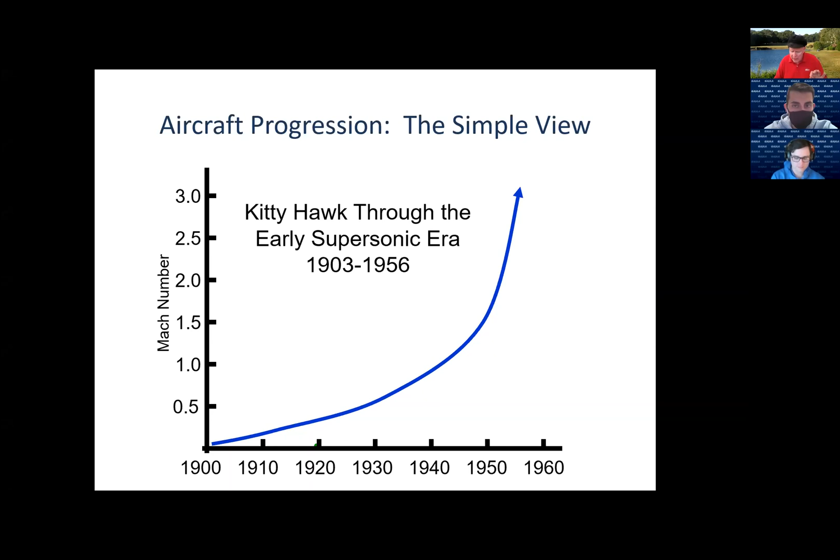And you know, it's your typical biological growth curve type curve and whatnot. And what it really covers, though, what it masks is a lot of things that took place beneath the surface.

So, for example, if we put this in terms of aircraft technology in this time period, you're going basically from the very earliest monoplanes in the pre-World War I era through the first practical propeller-driven transports of the early 1930s, through the first practical turbojet transports of the 1950s, and on up to vehicles that are getting fairly exotic, sustained Mach 3 cruise with the Lockheed Blackbird, things like that.

Now, if you break down that curve and take a look at it in a more detailed fashion according to aircraft type, you see you're dealing with a bunch of curves. You have piston aircraft typified by high-speed fighter airplanes, and that curve breaks off at about Mach 0.65 to 0.7 in the mid-1940s. Piston airliners continue on into the early 1950s, basically at about Mach 0.45 to 0.5.

Then you see the tremendous advances with turbojet propulsion, and then the rocket research airplanes. And once again, this is only going through that Mach 3 regime when you're taking a look from the middle 1950s perspective.

And you see a funny thing take place, and that is in the middle 1950s, you start to see what really is a plateau. Jet fighters peak out at about Mach 2, and they're still really in that region today. Turbojet airliners are in the 0.82, 0.84, 0.85 region, things like that. So there's this plateau, but is there really a plateau here?

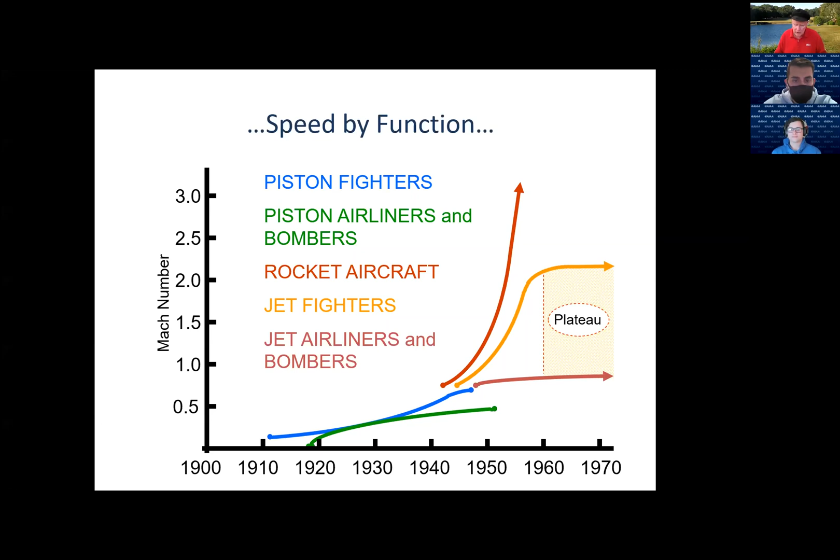Well, actually, if you take a look at it, there's many, many different things taking place in that plateau if we run this out to the present day: composite structures, more efficient propulsion systems, the advent of the turbofan, thrust-to-weight ratios going beyond 1 because of engine technology, digital fly-by-wire, low observables for military airplanes, the so-called stealth revolution, refined transonic aerodynamics with Dick Whitcomb and the supercritical wing, satellite-based navigation, unmanned aerial vehicles, sensors, command, control, communications, computers, intelligence, surveillance, reconnaissance, C4ISR as we term it. All these things are feeding in.

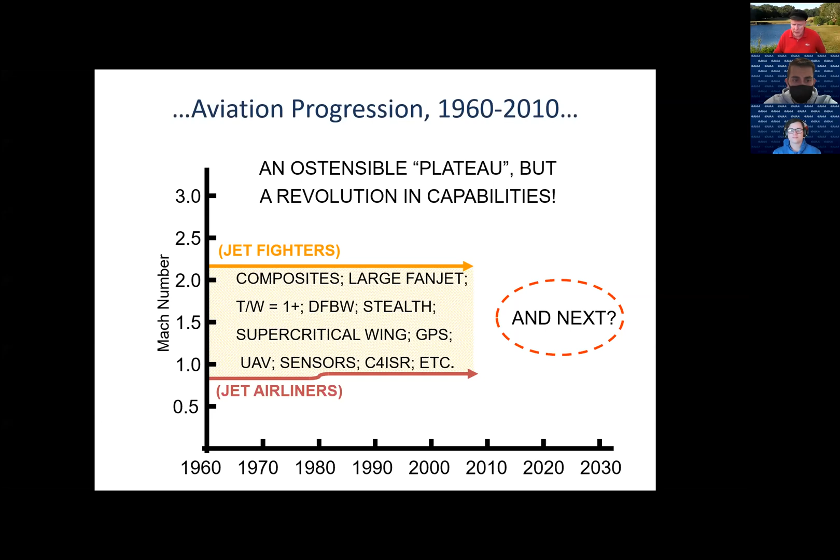And then we have this big question mark that we've been dealing with over about the last 5, 6 years, and that's what's next. Well, what's next is everything you're reading about today: drones, urban mobility, hypersonics, stuff like that. And we'll get to that part in a little bit.

But just to do some review, the 20th century was really a century where we had a 3-dimensional revolution. We were able to operate above the surface of the earth, and we were able to operate under the surface of the sea. So mobility really became 3-dimensional, if you will, with the advent of the airplane and the submarine.

Now, surprisingly, although we invented the airplane in the United States, by 1912, for a whole series of factors, we really started falling behind. And the country that leapt to the forefront of aviation technology in the immediate pre-World War I time period was France.

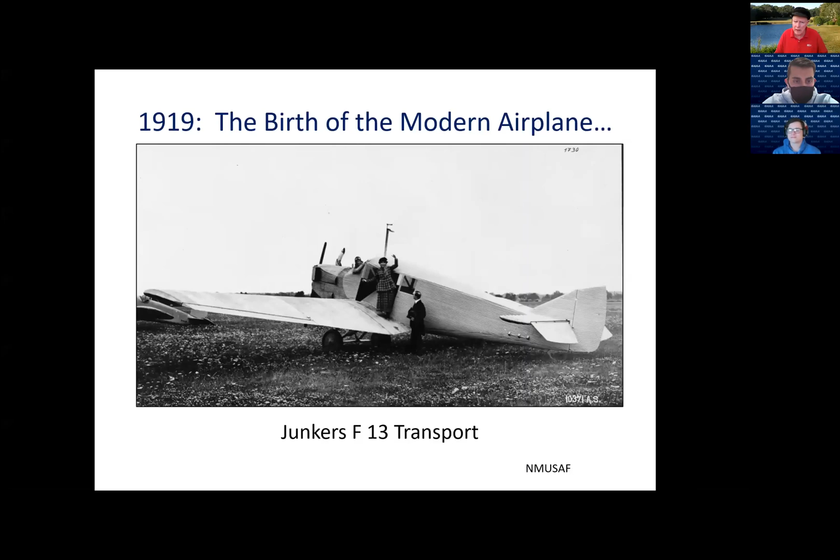The problem with this technology is that basically we're dealing with insufficiency in terms of aeronautical propulsion. We simply don't have the refined aerodynamics to make very highly streamlined, highly efficient airplanes on one hand. And on the other hand, the engines we have are relatively low powered.

A good example is the 1920s, the time period in which we see a lot of investment in what we call trimotors, three-motor airplanes. The reason you have that is because the drag loading of the aircraft was so great that if you lost an engine on a twin engine airplane, it would descend and crash. You know that old joke about twin engine airplanes—the second engine takes you to the scene of the crash. Well, the trimotor at least guaranteed you could somewhat remain aloft if you lost one of the engines. And of course, that's a commentary on engine reliability at that time.

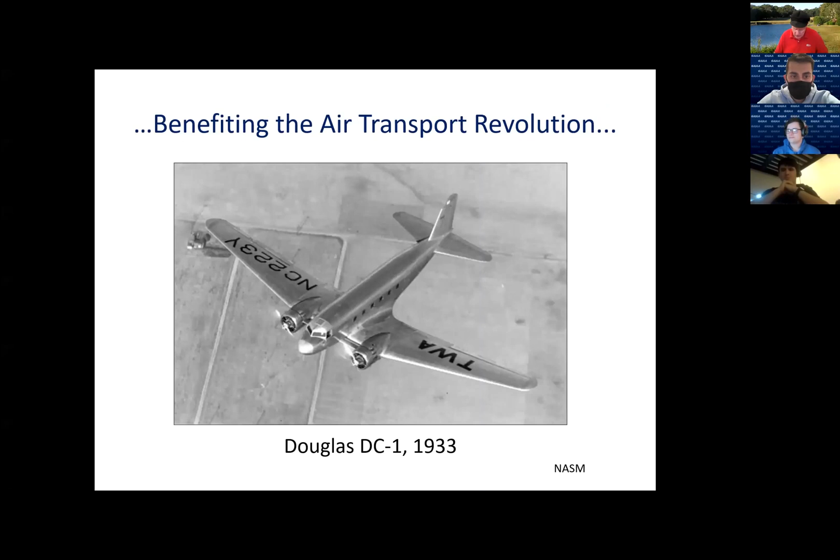And that sets the stage for what becomes a genuine design revolution, so that by the late 1930s, it's a revolution that we in this country are really leading, thanks largely to one major manufacturer, the Douglas Company, now part of the Boeing enterprise. And what this really gives us is a dual-use industrial base—one you can apply to civil aviation, and one you can also apply to military aviation.

And this is really thanks to one big thing, and that is the maturation of the piston engine. The piston engine, by this time, is giving you about 1 horsepower for every pound of engine weight. So a 2,000 horsepower engine weighs about a ton, okay?

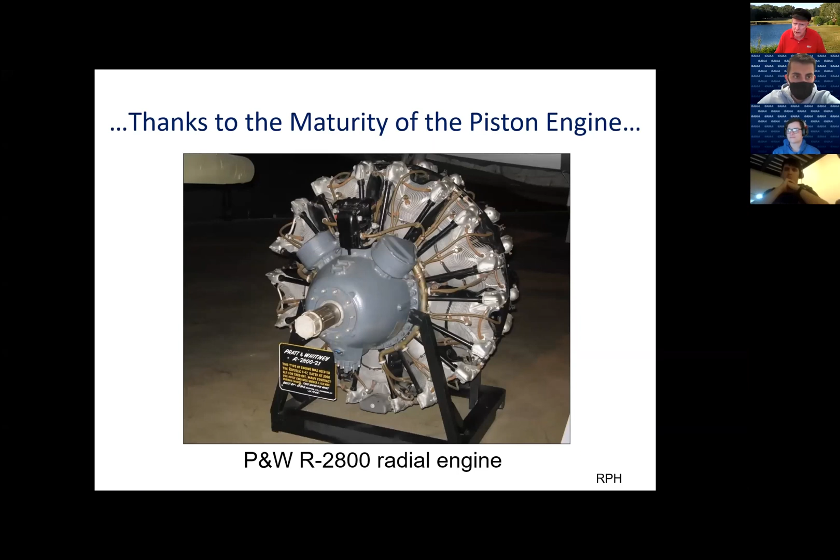But what people don't really appreciate, certainly not in the engine community, is there's a revolution about to come. And that revolution is going to involve high-speed flight, and it's going to require dramatically different propulsion. The first indications of it, oddly enough, come about in 1919.

That's when, if you take a look at the aerodynamics of propellers—and of course a propeller is nothing more than a rotating wing—you see that the tip speeds of the propeller are approaching the speed of sound. In some cases, they're reaching it. And what you're seeing is a dramatic increase in drag and a dramatic decrease in lift. So you're having all the classic problems that an airplane with a wing will have if that airplane approaches the speed of sound at the same time.

Now, we were starting to see one form of propulsion that would play an influential role in high-speed flight, and that was the advent of the rocket engine. The rocket engine, of course, goes back to antiquity—the black powder rocket goes back to ancient China. But this was the development of the liquid fuel engine, and then later on, the development of solid fuel engines that had much more complex solid fuel oxidizers and mixes.

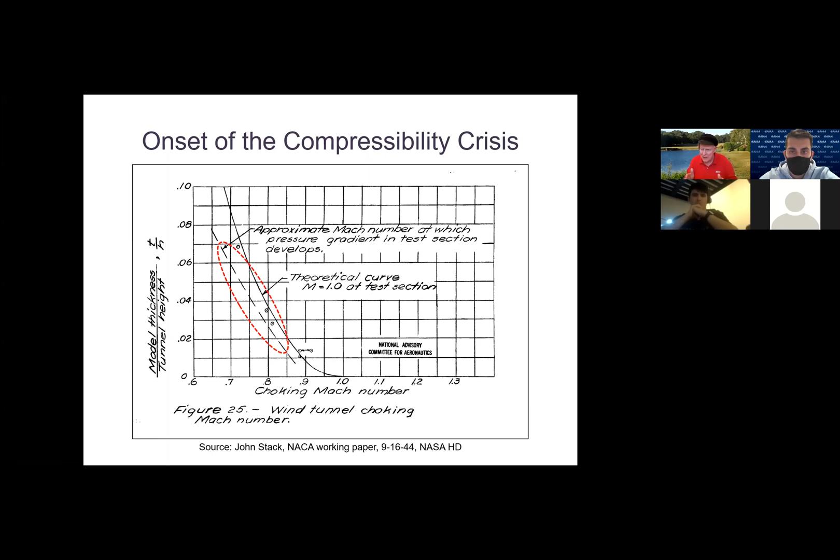Between say Mach 0.75 and Mach 1.25, that 0.5 Mach number region was basically a big question mark. Oddly enough, if you got completely supersonic flow through the tunnel, with streamlined flow lines off the model, the reflection problem went away. So you could get very good high-speed tunnel data, and very good low-speed tunnel data, but it was like the three little bears in the porridge - you didn't get that just right mix in the middle.

So Stack proposed that instead of using wind tunnels, we actually needed to develop specialized streamlined aircraft that would be instrumented and could be used to fly within the high-speed regime, which he defined as roughly 450 miles an hour and above, to get basic data. This didn't really go anywhere at the time, but it was in many ways the birth of what we would call the research airplane concept, which became very important later.

A more interesting development at the time was that of a German fluid dynamicist named Adolf Busemann, who in 1935, at the Volta Conference in Rome, promulgated the swept wing as a means of alleviating transonic drag rise - in effect fooling the air into thinking the wing was going slower than it actually was. Now, this paper did not gain a great deal of attention at the time, and I've often wondered why.

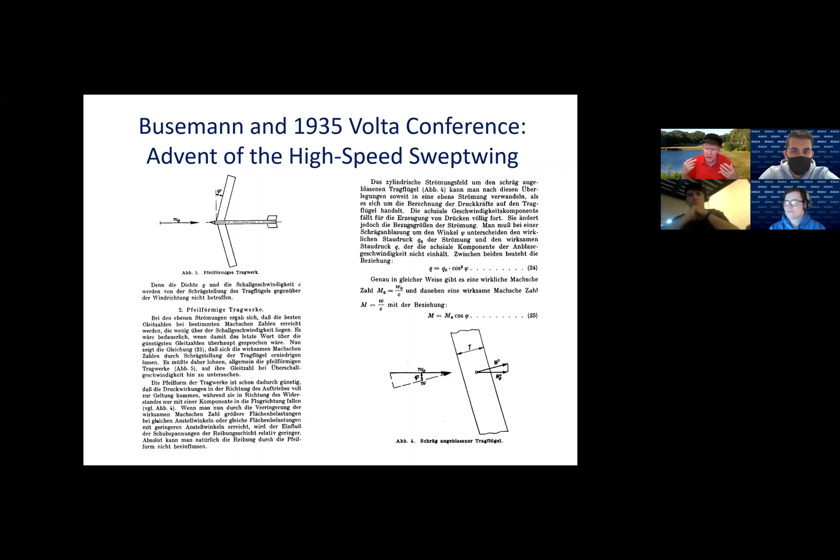I think it may be because of this drawing you see in the upper left. If you take a look at his swept planform, that's a very slight sweep angle that he shows - not that different from what people were seeing on conventional transport airplanes of the time. Think of the DC-3, for example - if you fill in the trailing edge, it has a swept leading edge somewhat like that. So I don't think people necessarily thought of this as revolutionary as it truly was.

But Busemann certainly did. By 1940, the Germans, who were pursuing the development of rocketry to offset treaty limits placed upon them after the First World War, were exploring the idea of very long-range rockets that might actually be lifting reentry vehicles using sharply swept, low aspect ratio wings.

On the left you see a 1940 Schlieren photograph of a wind tunnel test taken at Peenemünde of an A4, the technical designation for what was known as the V2 operational weapon. On the right you see the so-called A4B, an experimental variant of the V2 with a low aspect ratio wing that was flown in 1945. We'll mention this a little bit later.

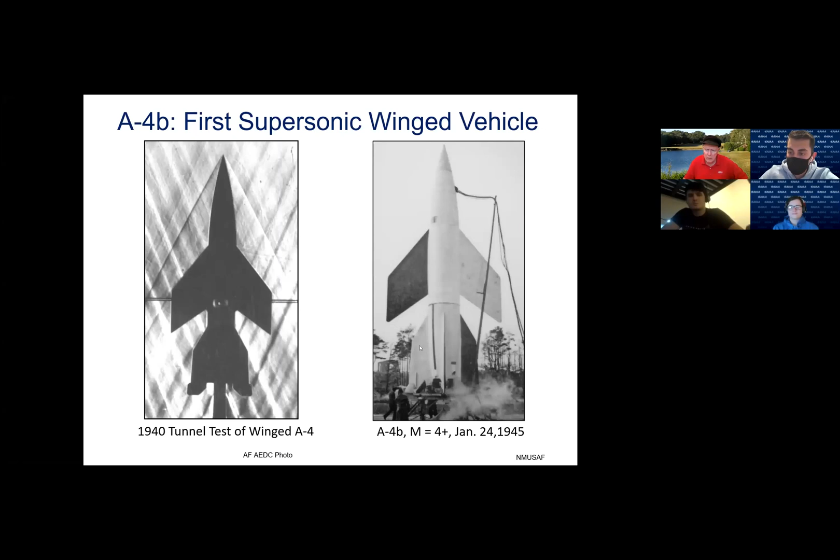Now, while people were looking at the very high speed side of things, there was a practical and quite risky development underway. In the 1930s, around the world, all the leading aeronautical nations were developing high-speed fighters. We kind of think this is a little ludicrous today, because they didn't even have a top speed half that of, say, a commercial business jet. But at the time, these were considered high-speed airplanes.

They typically had a radial engine or an inline streamlined engine in the nose, but their configurations were relatively awkward, with lots of bumps and humps. Yet in a high-speed dive, they could reach about Mach 0.7 to 0.75.

And when they did, they would start to encounter high drag rise, a shift in the center of lift, and the development of turbulence that would then beat the horizontal tail of the airplane to death, so to speak. On the more streamlined airplanes that could get to higher Mach numbers in a dive, say 0.76, 0.77, this actually became quite dangerous, because if a pilot tried to pull out too quickly he could exceed the structural load limits of the airplane. The first example of this took place in 1937 when a German test pilot named Jodelbauer was killed flying an early Messerschmitt 109.

We were not immune in the United States. We had tremendous problems with this airplane, the P-38, which in 1941, during a highly publicized dive test during contracted testing in California, the tail came off the airplane.

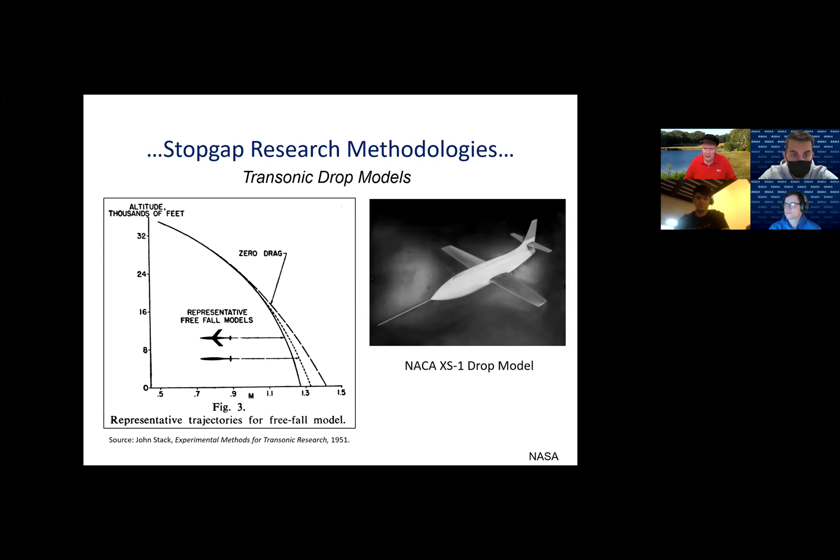In this case, the first supersonic airplane, the Bell XS-1. Another stopgap methodology was the rocket-propelled model. In this particular case, you simply take a model, fire it off, and this method we still use in some respects today. You fire it off, and then measure what's happening to that model as it's flying out over the Atlantic. The launches were made out of what is now the NASA Wallops Launch Center. Now, of course, you have scaling issues when dealing with models as opposed to full-size vehicles, but nevertheless you can get some pretty good information on things going on.

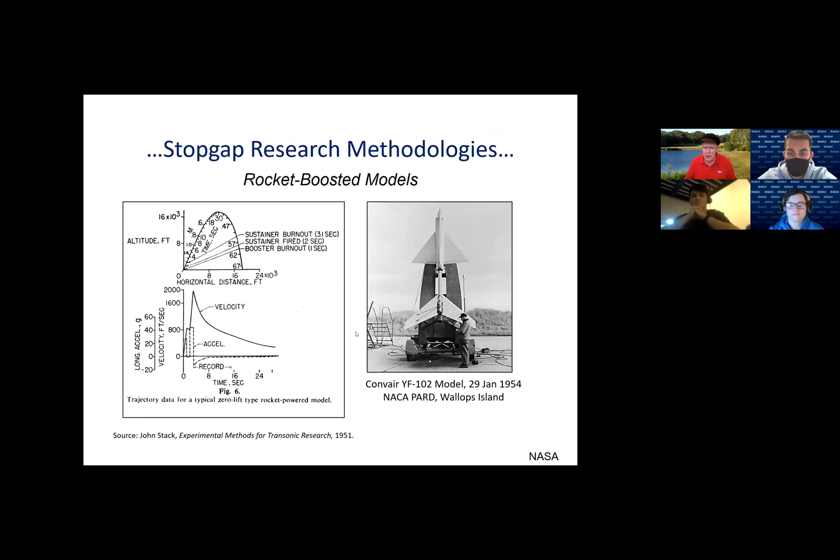All this is designed to overcome one problem, and that was the problem of transonic testing in wind tunnels at the time. That problem was not resolved until the end of the 1940s, when we had the advent of the so-called slotted throat wind tunnel. Now, what that led to was the development of specialized research airplanes.

And the specialized research airplanes came about at an interesting time, because at the end of the 1930s and into the 1940s we had the advent of a radical new form of propulsion, the gas turbine engine. It was a revolution that began in Germany and Britain, and then was transposed over here to the United States. There were two major figures: one was a British guy named Frank Whittle, who first conceived the jet engine, the gas turbine engine, and then a German named Hans von Ohain. They were both fortunate enough to get a mix of industrial and governmental support that allowed them to go ahead.

We became aware of Whittle's work in 1941, and the government arranged for the importation of Whittle engine technology. We made a research airplane using General Electric jet engines that copied this Whittle engine technology. So we got into the jet engine business in 1942. By 1944, you were seeing the first operational jet fighters. Now, the jet engine gave you the promise of flight above 500 miles an hour. But if you're going to operate in level flight at 500 miles an hour, you're right in the middle of the sweet spot for all these compressibility problems. So now you have to resolve those high-speed flight problems.

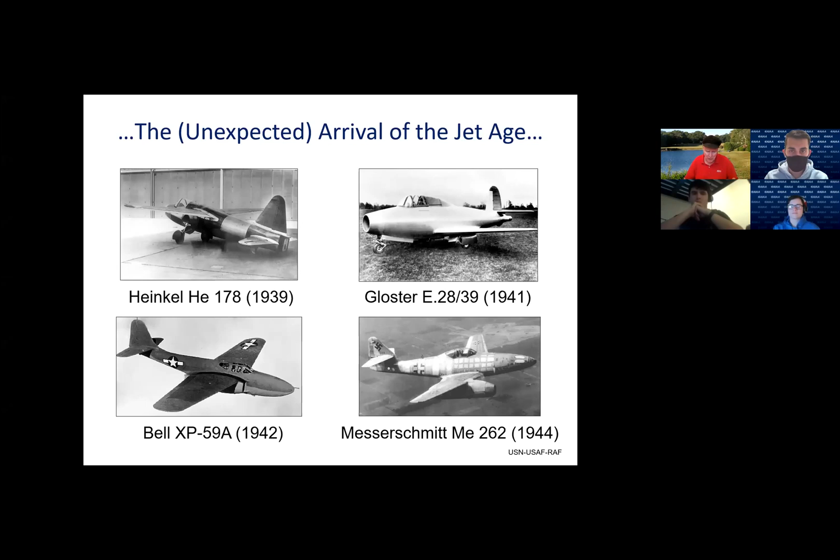Well, at first we take some of these early jets, instrument them, and use them for dive tests and stuff like that. And people realize, you know, this really isn't the safest thing you've got going. The British started an experimental research program that was actually quite ambitious in 1943. It was for an aircraft called the Miles M52. This would have been a highly streamlined turbojet airplane. The pilot would have sat in the inlet—not sure most pilots would be very happy with that, to be quite honest. But this thing was going to be turbojet powered with an afterburner on the back end, which itself was kind of a novelty. It was canceled in the spring of 1946, which was a huge, huge mistake.

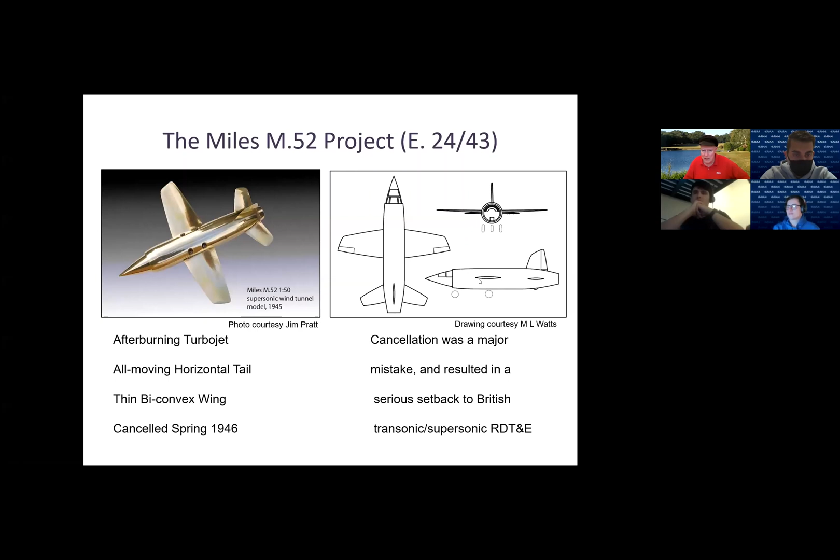Nevertheless, if we take a look at this vehicle, we see some of the hallmarks we would see today of high-speed design. What you'd want is an area-ruled fuselage, pinched in here. You'd want that horizontal tail lower, or maybe angled down like an F4 or something like that. But the wing thickness, the tail thickness—all that stuff works pretty well.

Now, any idea that the swept wing was going to be a panacea for high-speed flight kind of went out the window in 1946, when we had an accident in Britain to this particular aircraft called the de Havilland Swallow. It was a tailless aircraft. Now, I mentioned earlier that when you got into the transonic region, you would see pressure changes on the wing. And so with a transonic tailless aircraft, this is in the pre-fly-by-wire computer era, because in the computer era you could control this—like the B-2, you can control it, and it has these kinds of issues.

But in the pre-fly-by-wire era, you would get longitudinal pitching motions, oscillatory motions, and they would either be steady state in periodicity and amplitude, or else, worst case, you'd have divergences—an increase in amplitude and an increase in frequency. Both happened to the de Havilland Swallow, which shed its wings at Mach 0.87 at low altitude, did a violent pitch up, and the pilot was killed.

That indicated that the sound barrier had teeth. Now, by this time, as a result of a meeting that had taken place in 1943, when you had the head of the Royal Aircraft Establishment come to Washington, we had launched in America what we now call the X-Series program. The X-Series aircraft that you still hear about. The origins are back in December 1943, followed up then with a meeting in March 1944 at the old Langley Research Center, now NASA Langley Research Center today. In those days, it was called the Langley Memorial Aeronautical Laboratory.

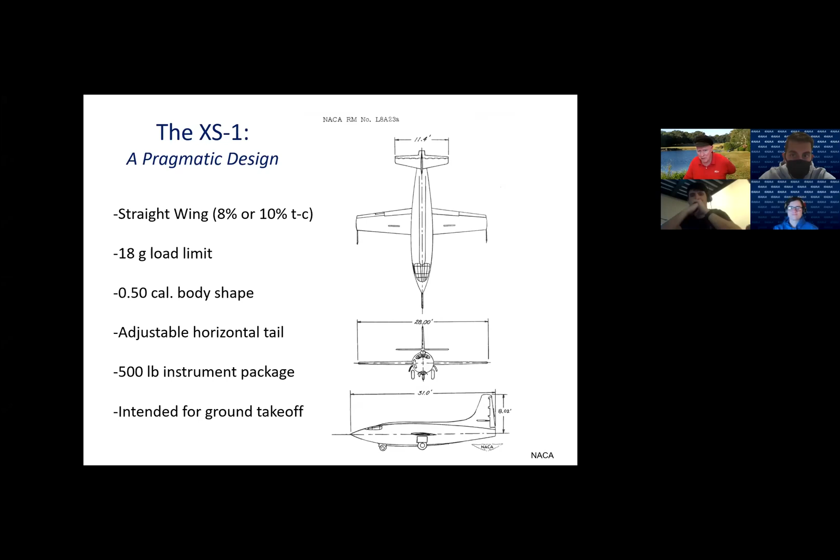It would have an instrument package of 500 pounds right on top of the center of the fuselage here. And it was intended at this time for ground takeoff, which in retrospect was not wise, because here was a high performance 6,000 pound thrust rocket engine aircraft with conventional landing gear, heavily loaded, and you were going to operate this thing off a runway. If the engine burst, you were probably going to lose the airplane. Cooler heads prevailed, and eventually they modified it for air launch, which made perfect sense.

Here's basically what it looked like inside. Originally, the X-1 was supposed to have conformal tanks that were basically modified cylinders. And the fuel and oxidizer were to be sucked out by a turbo pump and expelled into the engine, a 4-barrel engine, with each of the 4 thrust chambers producing 1,500 pounds thrust. But the turbo pump fell behind schedule. And so Bell instead put in two spheres. The alcohol water tank is a semi-sphere. And then they stuck in a whole bunch of little high pressure bottles and manifolds to give you a blowdown system that would basically expel the propellants into the engine. Well, what that did is it cut down on the useful volume of the fuel.

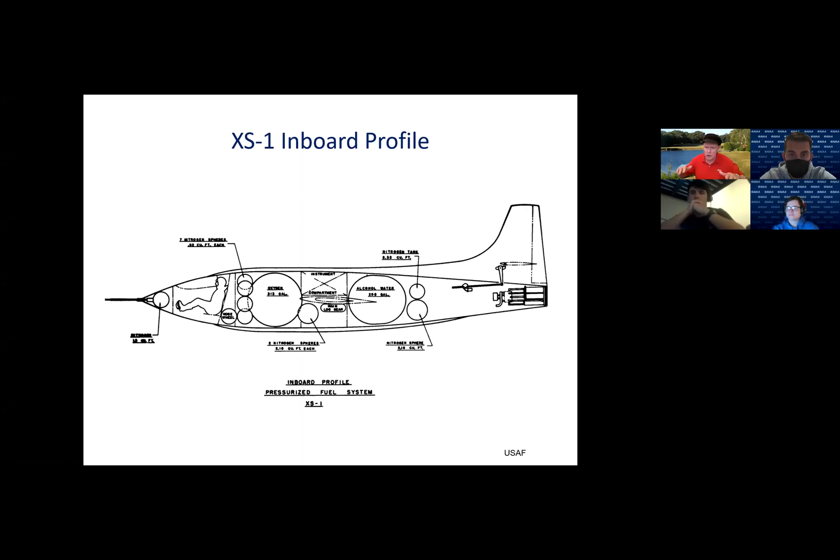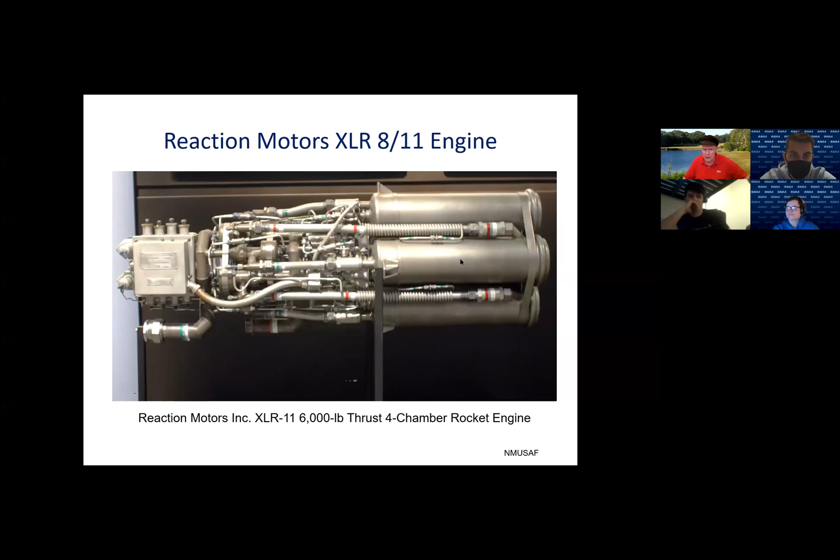So the airplane's powered flight endurance went from 4.5 minutes to 2.5 minutes, which meant that now you really had no choice but to air launch this guy in flight. Now, the engine itself was very, very simple. It was not throttleable. You simply fired a permission switch, 1, 2, 3, 4 little switches in 1,500-pound thrust increments, and that gave you the full 6,000 pounds of thrust, okay?

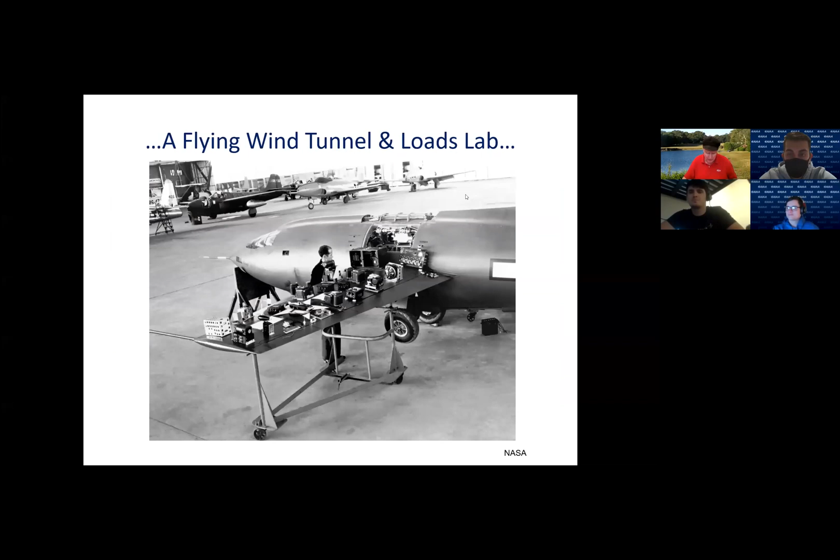Here's the instruments, there's the instrument bay. Of course, the airplane was wired with manometers, strain gauges. It had early telemetry to telemeter data back. And it began flying in 1946. This is one of the early test flights of the second XS-1, so-called 46063. The first one, the first supersonic airplane, is 46062.

And that's Edwards Air Force Base. That's the Atchison, Topeka, and Santa Fe Railroad down there by Highway 58. And that is beautiful country out there. I got to tell you, if you like flight tests and you like the desert, it's wonderful. I spent many years in Edwards, and you know, it's just fabulous. But anyway, think about that in your own career progression.

Now, moving right along, here's the X1 test team. Now, this guy here is very famous. You've probably all heard of him. Chuck Yeager, first supersonic pilot. Walt Williams was the NACA engineer who basically ran the test effort out at Edwards. This is Dee Beeler here, chief engineer. Chuck Yeager's buddy, Jack Ridley, was the Air Force project engineer on the project.

This is Gerald Truszynski here, who ran the instrumentation for the X1. Later set up the whole NASA spacecraft tracking network that we use to the present day. And this was Joe Vensel, who was the NACA's senior pilot. He was out of the cockpit at this point, and he had one great characteristic. I knew Joe Vensel before he died. Really neat guy. He was absolutely profoundly deaf from all his years in open cockpit airplanes. And very often in meetings, if he didn't like what was going on, he'd simply turn his hearing aid off and go to sleep. Great guy.

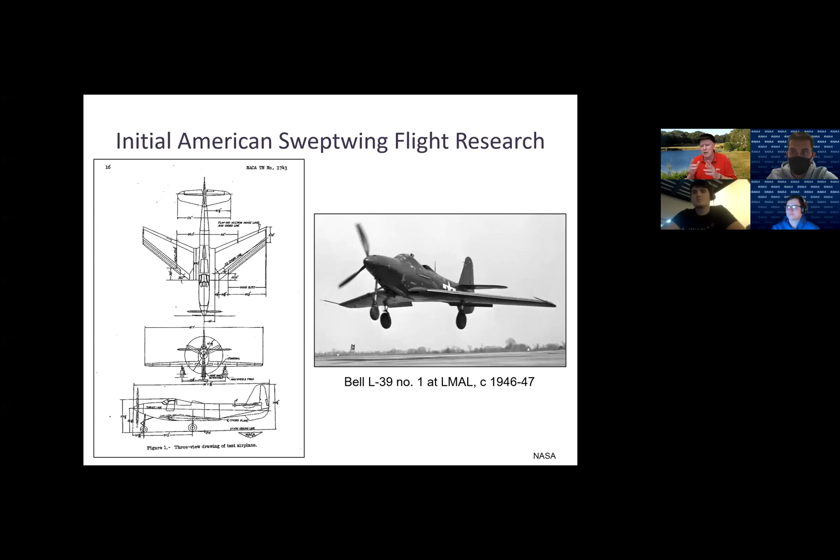But the swept wing also gave you some problems at low speed. You had a lot of handling qualities problems and issues. So oddly enough, the first swept wing airplane that the United States makes is where we modify a Bell piston engine fighter with a 35-degree swept wing. And we play all sorts of games with the leading edge, with flap combinations, things like this, to try to get some information on whether we can actually apply this to high-speed aircraft.

Okay, so that they're safe in the low speed around the pattern regime. At the same time, the military services, having funded this Navy project called the D558 and this Air Force project called the X1, say, well, geez, you know, if swept wings look like the next big thing, we got to get in on this. And so the Navy says, well, you know, we were going to build 6 of this D558. Why don't we just build 3 of them? And we'll take the other 3 and we will design them as special purpose swept wing research airplanes.

So the NACA said, well, if you take a D558 and you put a swept wing on it, it's going to look something like this. And there was an NACA engineer at that time, and his name was William Perl. And William Perl looked at that and said, yeah, thanks very much. I think we can do something with that. And William Perl was a Soviet intelligence agent. And so he takes it to the Russians. And if you take a look at the MiG-15, that actually looks pretty much like a MiG-15. Thank you, William Perl, who, by the way, then did a couple of years in jail when we discovered that he was, you know, basically a traitor.